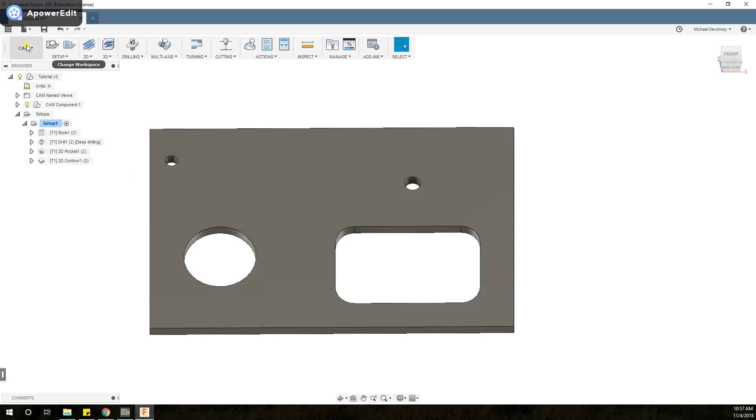In Fusion 360, because of everything being vertically integrated, we can go back into the model. This component is active. We go into the sketches, and let's go ahead and edit this sketch, and we'll make some of those changes that we talked about.

So let's just drag this over here, and let's create another circle, and we'll dimension this to be 0.125, and we'll make another circle here that's, let's make this dimension 0.2.

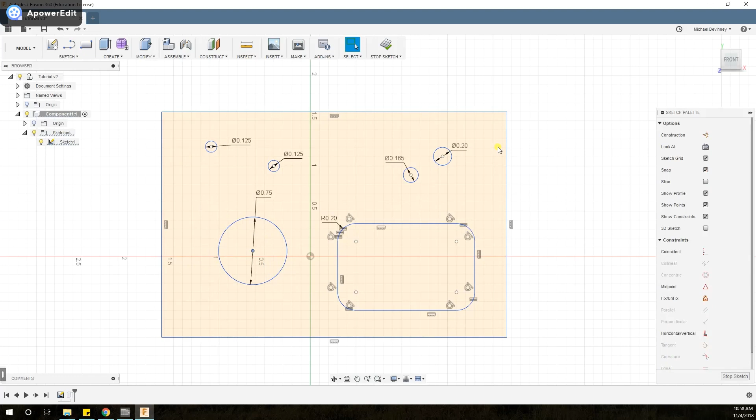And let's move this guy over. With other utilities, you'd have to generate this new part. You'd have to then export it into your CAM software, and you would have to go through that entire process again. But with Fusion 360, all we have to do is stop this sketch.

As you can see, we modified the sketch, but we haven't modified the extrude command. So if we were to edit this extrude, all we have to do is select the additional parts and click OK, and you can see we have our new part that needs to be machined.

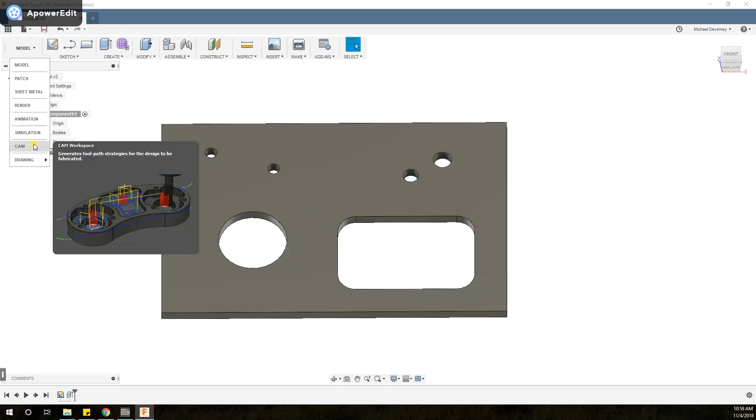So let's just go ahead and click Save. Let's go down into the CAM tab, and you can see that there are these red warnings. Essentially what this is saying is, hey, that feature has changed. You need to regenerate my G-code.

So you just right-click on the setup, or you could do it for each operation. But let's just go to the setup, and we'll just click generate, and it's going to regenerate all those tool paths.

And so if we were to click the bore operation, you can see it is boring this, but it hasn't bored that. So if you just come over here and click edit, you go to the geometry. We have one face selected. Let's just go ahead and select another face. And click OK. It's going to generate.

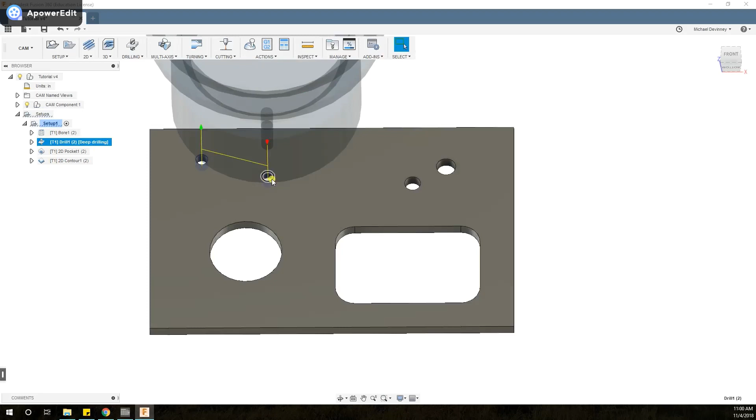And if we go to the deep drilling, what's cool about Fusion 360 is it automatically detects where there are similar operations, and it mirrors them. Because this is another 1/8 inch hole and we had applied a deep drill to it, it automatically detected this other hole and applied that operation.

The pocket, it regenerated the pocket that had been moved. And so, yeah, so it is done. If we were to simulate this, the entire process again...

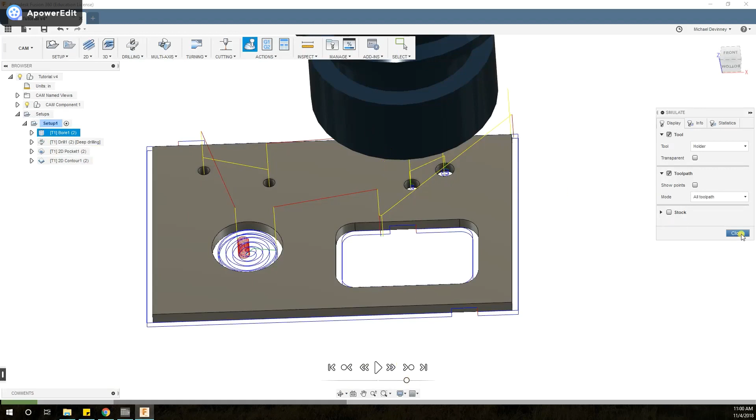You can see it goes through this entire operation again, and if you watch the previous video, you kind of know how this all works. Oh, and the stock isn't selected, let's just show the flute and select wall paint. So yeah, I'll just simulate this pretty fast. It's always good to check.

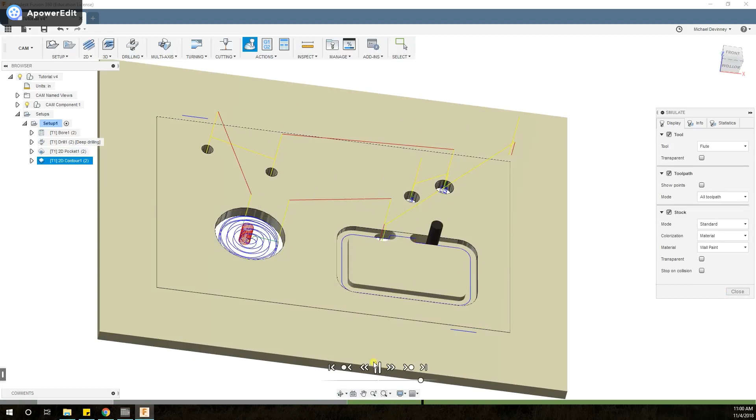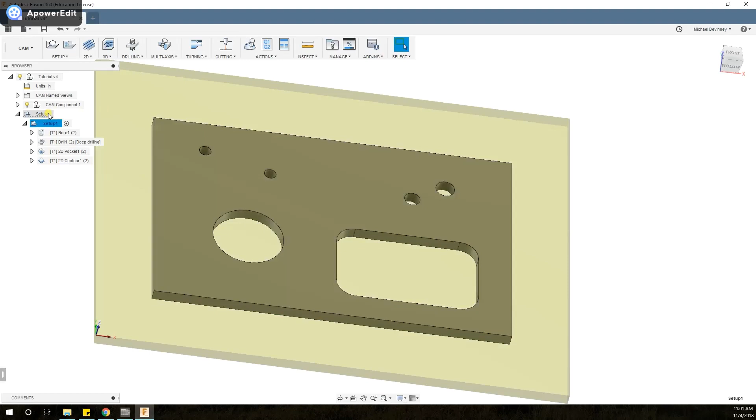All right, so the other thing that I wanted to talk about that I didn't really address in the prior tutorial video is, let's go, I want to point out something. So if you go and you edit this setup here...

We were lucky in that when we created the part, it was already in the plane that we wanted to machine in. Remember, this is the short side of the Nebula CNC router, and the y-axis is in the long, and then Z is positive from the tabletop. But there's times where our part won't be in the correct coordinate system.

So if we wanted to change, we would just come in here to, so right now it's model orientation. You would come in and select this z-axis and the x-axis. You can see here that the z-axis is highlighted. We would just select this here.

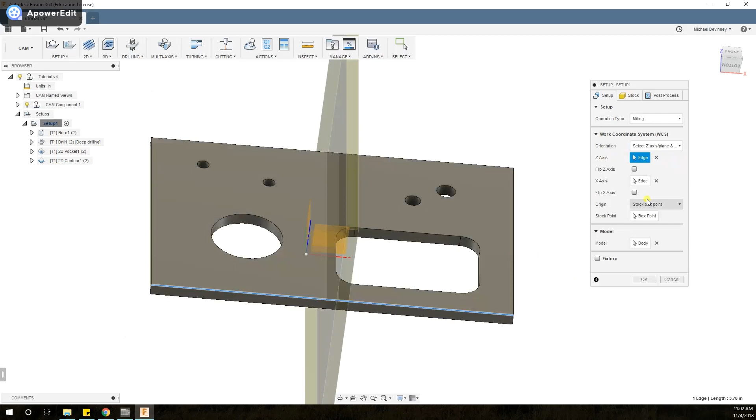But say, for instance, we wanted this to be the z-axis. You can see the stock and the part don't really work. So you want to come over here and just select a feature on the part that is in the z-axis. And then for the x-axis, you just select an edge.

So if we wanted, we could rotate this part on the mill. And so now, if we were to—whoops, everything's turned around—you can see that the model is now oriented where this is the y, the long axis of the table, and this is the x-axis of the table.

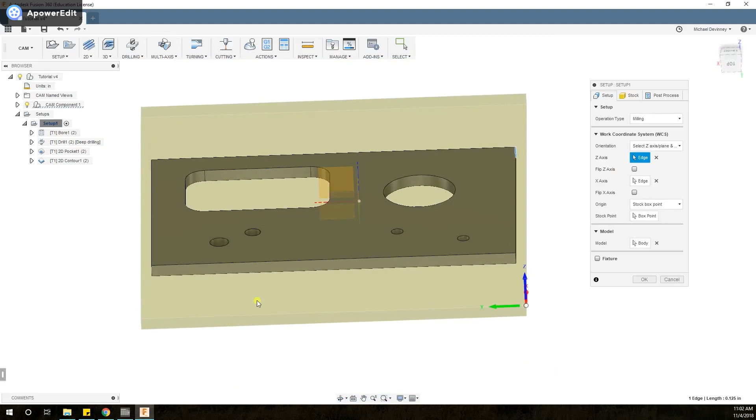And you can see that since we changed the coordinate system, we need to regenerate the G-code.

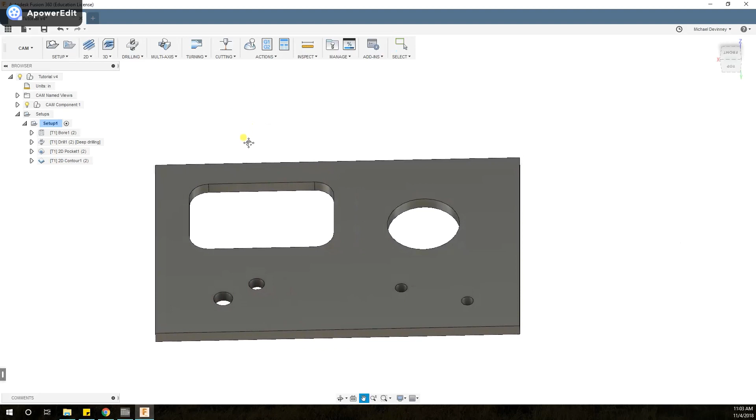All right, so that is the addendum. Hopefully this helps, and there will be more tutorials to come. Let me know what I can do to make these tutorials a little bit better, and I will try to improve. Thanks.